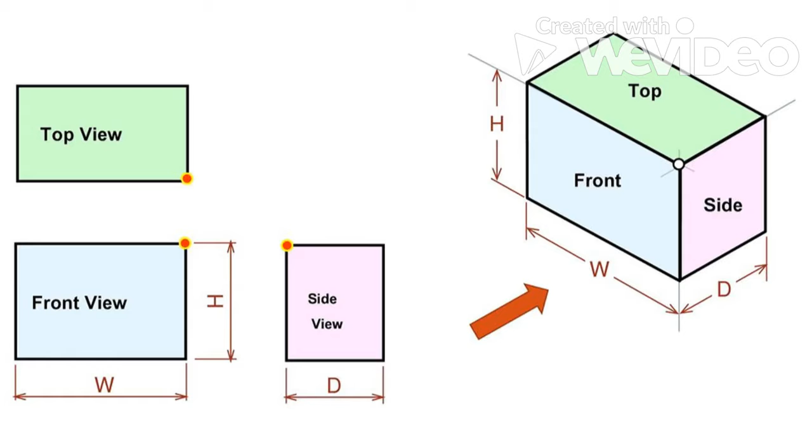When we combine these three views into a multi-view drawing, this is what is commonly referred to as an orthographic projection. It's a common method of representing a three-dimensional object using three two-dimensional projection drawings, usually the front, the side, and the top. Now, these drawings can be made by drawing from life, such as from a three-dimensional model, or you can use your imagination and just draw directly out of your head.

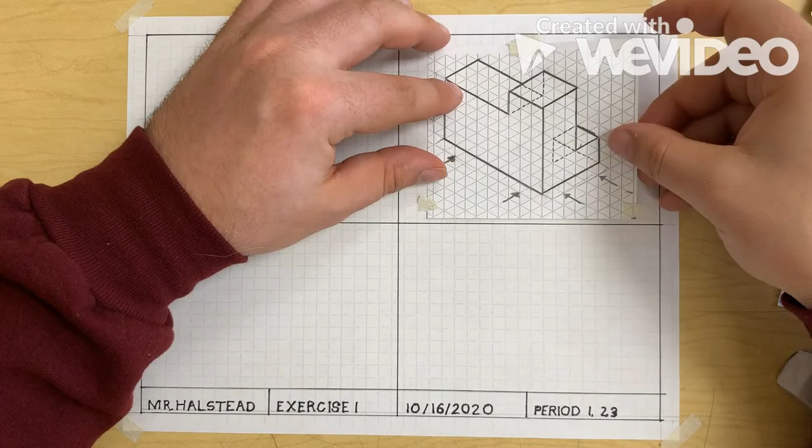Today we are going to be using an isometric drawing, just as we did in our last lesson, which for now I'll tape right here in the top right quadrant. This will later be removed, but you can work directly off your computer screen with the image I upload for you.

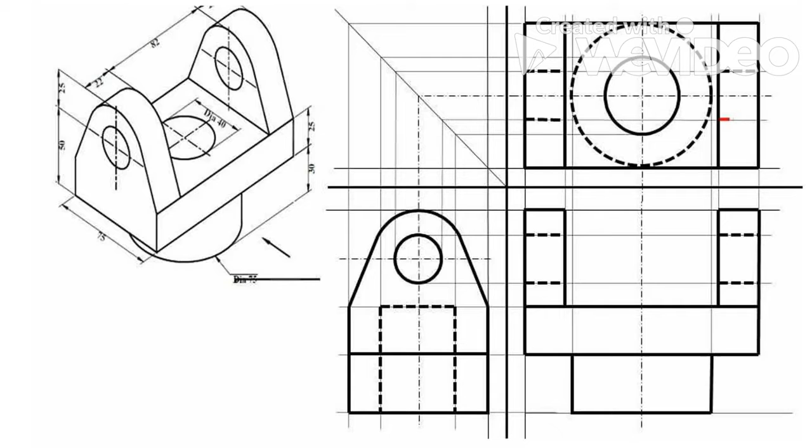Simple orthographic projection drawings such as this are commonly used to machine brackets for certain industrial purposes or simple parts, but with a bit more practice and a bit of imagination, you can make something more complicated, such as a design for an automotive company. Such a step would be an integral part in the design process. And it's also used in things like game design or 3D animation for designing characters as templates when doing 3D rendering.

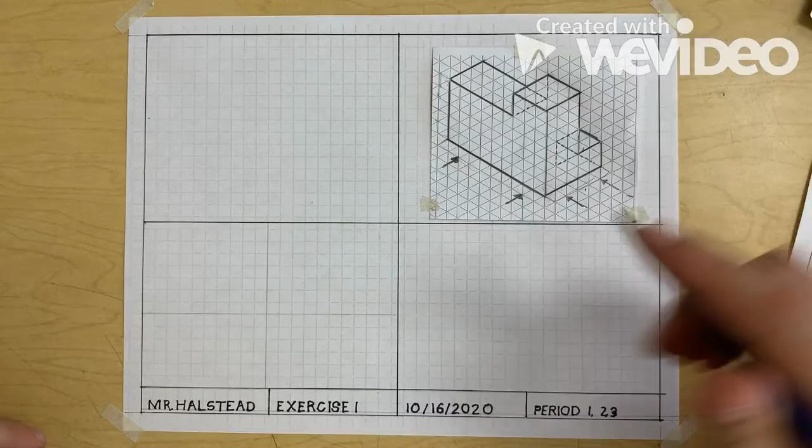So just to get caught back up to where we were last week, we did the first view, which is the front view projection. We know that the isometric graph paper is 1/4 inch, which corresponds to the 1/4 inch graph paper that we're using to draw our 2D projections. So we can just count the cells and quickly block in with some construction lines the shapes we need in the center of this drawing plane.

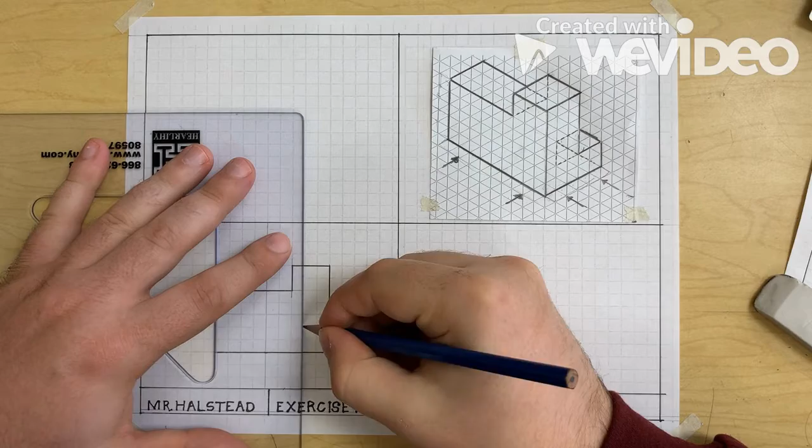And then we'll go back over with some visible lines to the outside edges of the object. And we'll include any necessary detail with some hidden lines for the back, which will be shown in another view in more detail, such as this side view projection, which I'm about to begin.

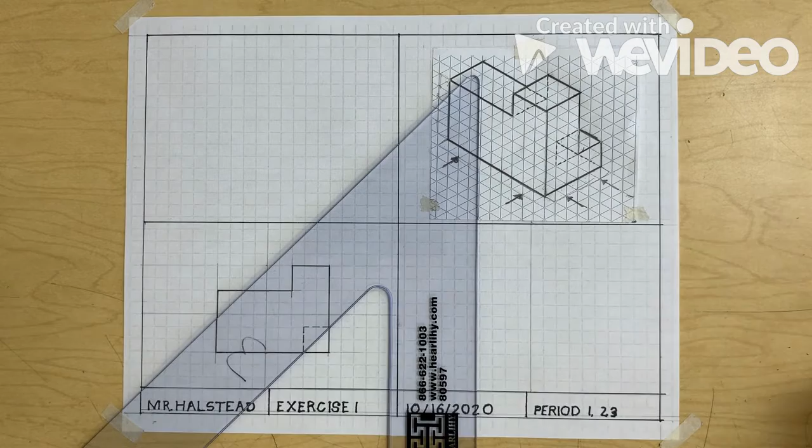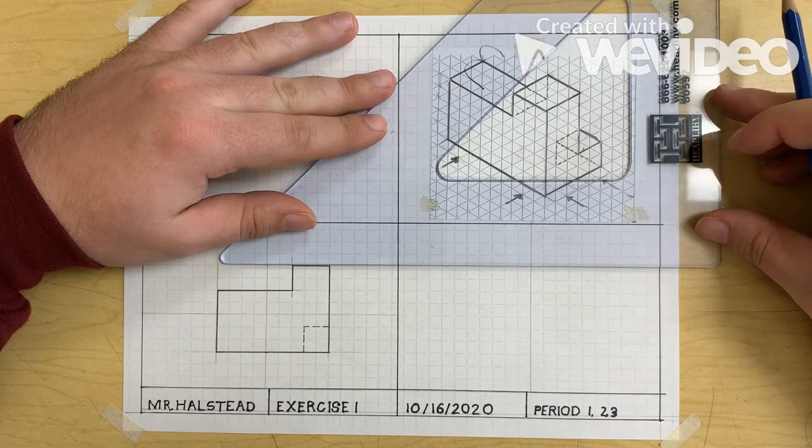Now, I'm going to choose where to draw this side view projection. I'm going to pick a line that's close to the middle of this quadrant, much like we did when we started the front view projection, but I'm not going to do it for the y-axis of the drawing, the up-down dimensions. I'm going to use something called projector lines to determine the height of each section of the shape I'm drawing, as opposed to duplicating the steps I took in creating my front view projection by remeasuring and recounting the number of cells in each shape.

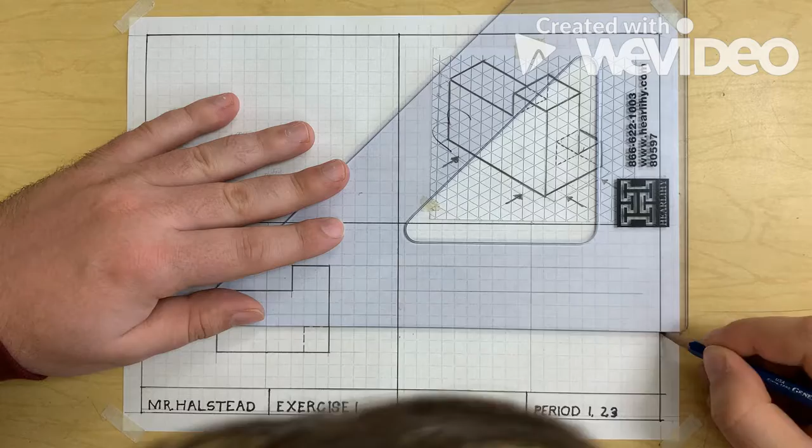This might not seem like a huge advantage on a simple drawing such as this, but when drawings become more and more complex, this method is a necessary step for ensuring that your two view projections correlate perfectly to one another and line up perfectly, because these are supposed to be the same object. If you draw your side view projection with things that don't line up perfectly, you're not drawing the same object anymore. You're drawing two different objects.

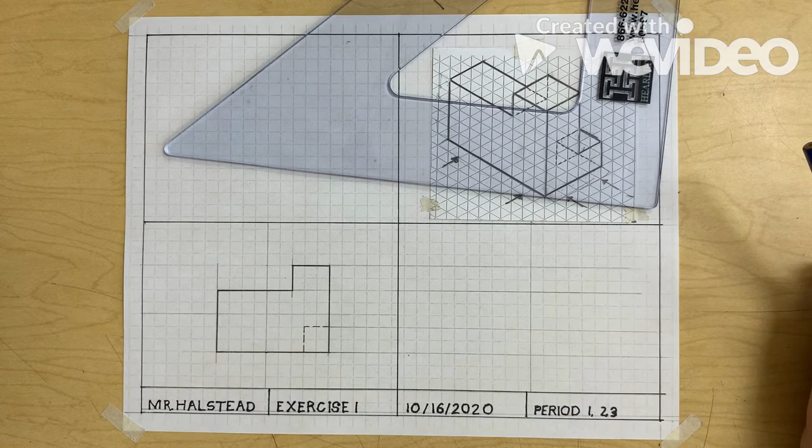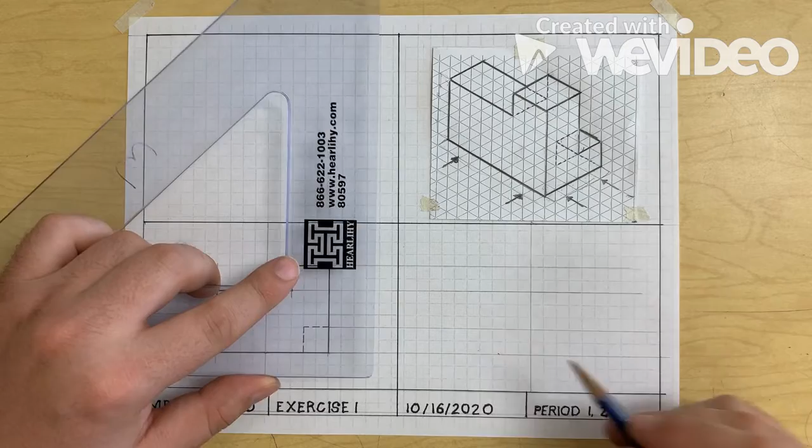So here we have these projection lines which give us the height measurement for all the important points in our drawing. It's almost as if we could slide that over and use it as a template. So now I just need to figure out how wide any given point on my drawing needs to be. I'm going to start with the base of the object as the widest point, being 4 cells wide. So I will count over 2 cells and draw a construction line for the left side of the object.

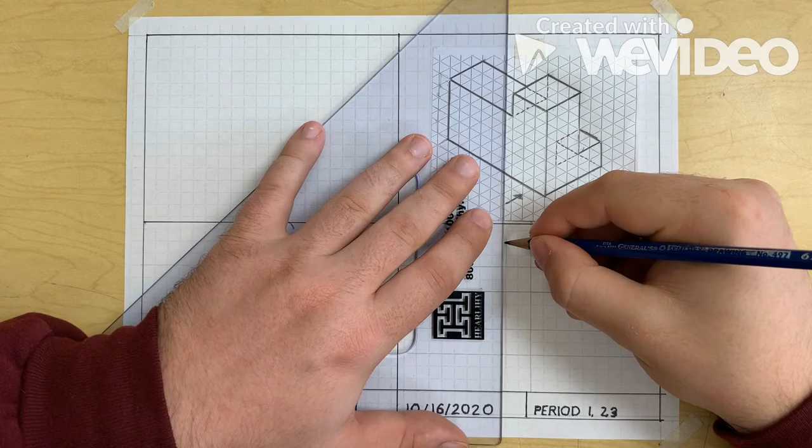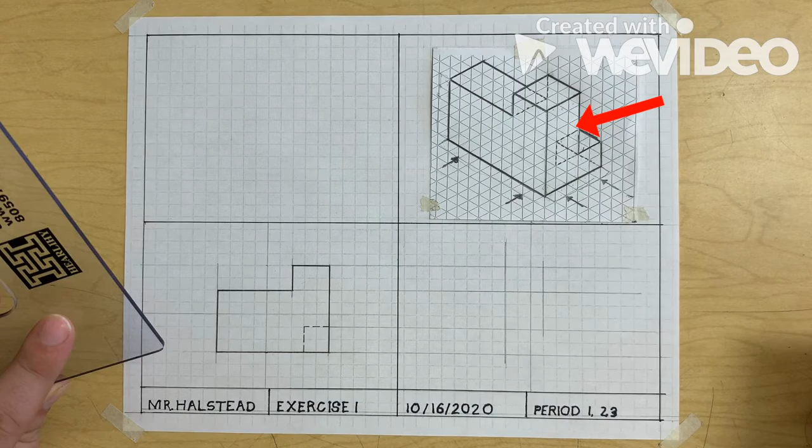That's that tall front corner on our isometric drawing. So I'm going to draw that right here with a light construction line. And then I'm going to need to make a measurement to see how wide the corresponding right side of that section is. So that's 3 wide, so I'll count 3 cells over, which puts me 1 cell past the midpoint. There's my right side of that section, and now there's the 2 cell tall section and 2 cell wide section. So I'll do a short construction line there.

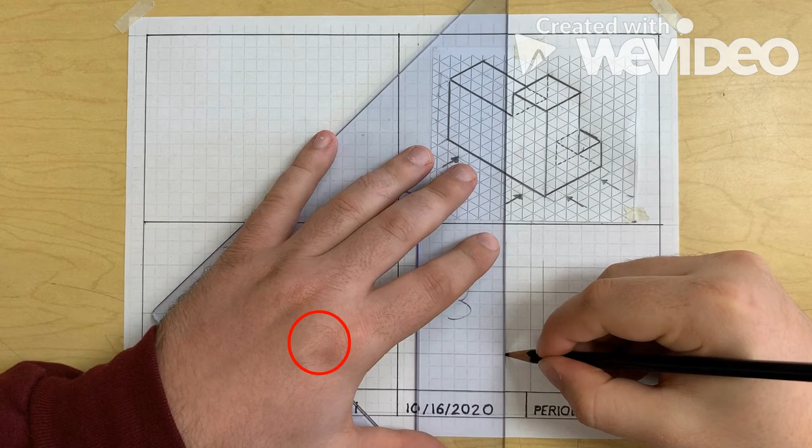And this is that section of the drawing that we drew in hidden lines on the front view projection, which we can now draw with object lines on the side view projection. This is an important distinction, which we'll learn about more when we talk about dimensioning. If you remember our lesson on the alphabet of lines, I said we can't dimension to hidden lines. So when I want to add dimensions to this drawing, I would need to do so in a view which shows the height of that section using visible lines.

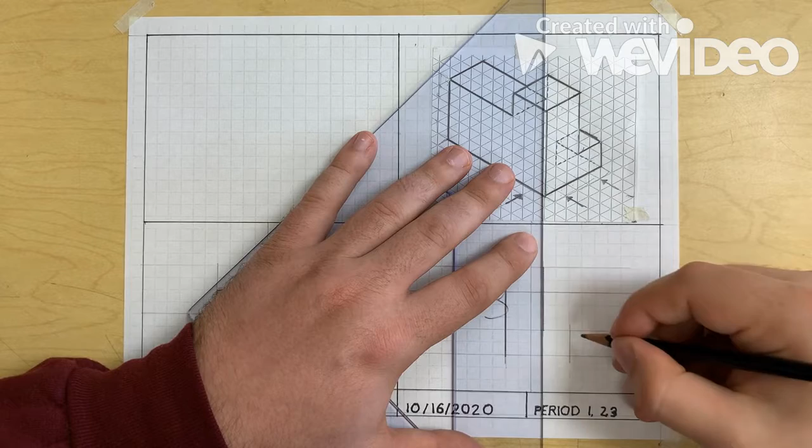And once I have everything blocked in using construction lines, it's very easy to go in and trace over those construction lines with the corresponding visible lines to create my projection. It should be easy to see this section that I'm blocking in using visible lines.

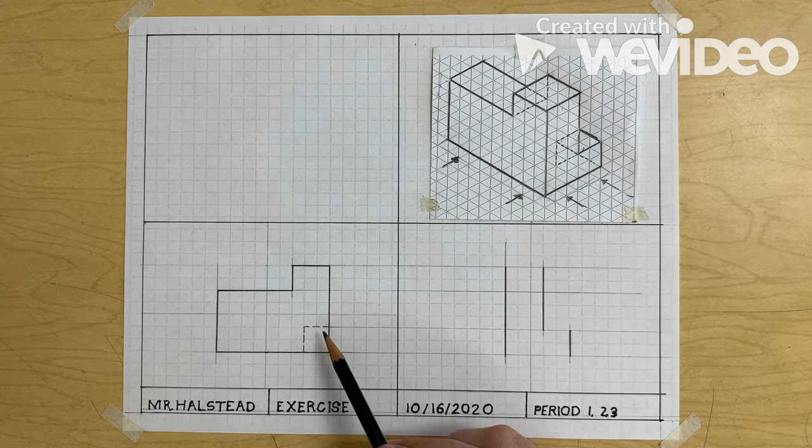Once I've finished blocking this section using the visible lines, I'm going to look to see where I may need to include detail not visible from this perspective with hidden lines, just as I did in the front view projection. But first, I really need to finish blocking this in using the visible lines to create my completed side view projection of the hard edges of the object.

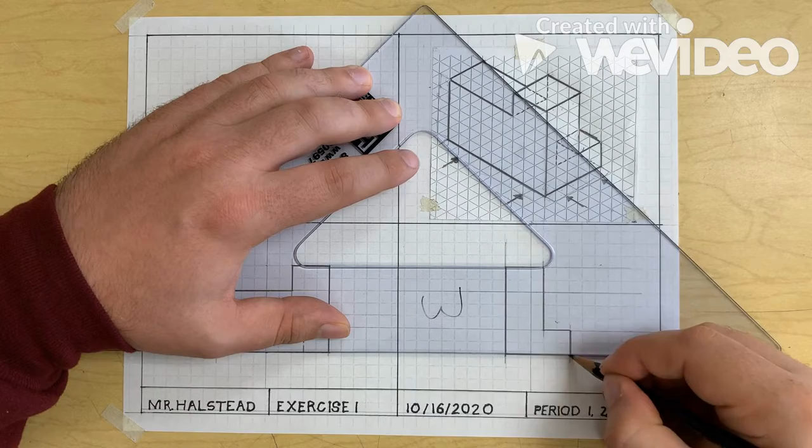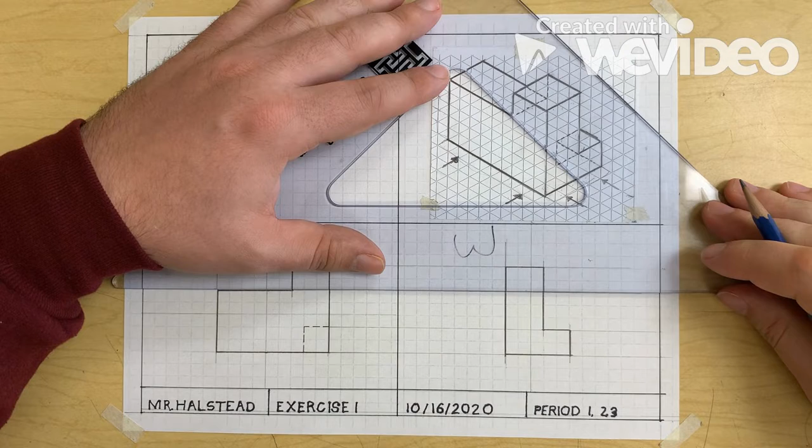Okay, now I want to look at my drawing and say what important information about this object is not visible from this view. And it's pretty easy to see that this back edge here is an important characteristic of the drawing that I can't see from this view. So I'm just going to draw that in exactly where that corner would be using some hidden lines. Those are those dashed lines we use in the front view projection.

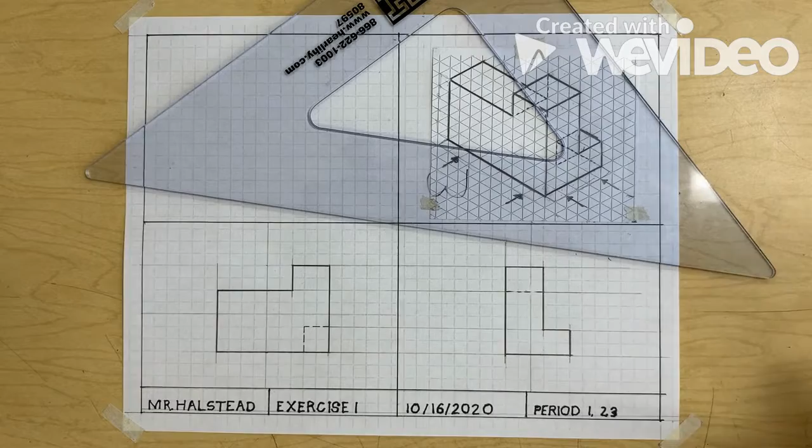We'll use those again here to show that the height of this object changes, and I just want to erase those construction lines that are still visible between my hidden line. I probably should have erased the construction lines first before drawing that hidden line. It makes things a lot easier.

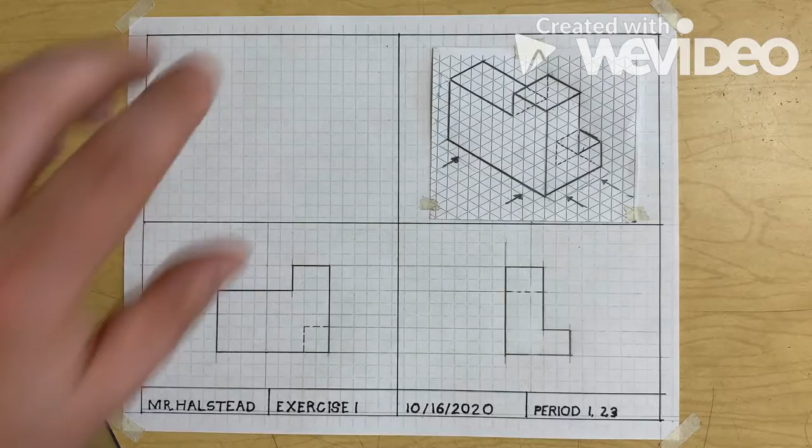So here I have my completed side view projection. It shows the important information I can't see with the hidden lines, and it's perfectly lined up to my front view projection. Now I need to do my top view projection. And again, we can use some information from our front view projection drawing to help us line up our proportions for our top view, just by extending some of these construction lines as projection lines.

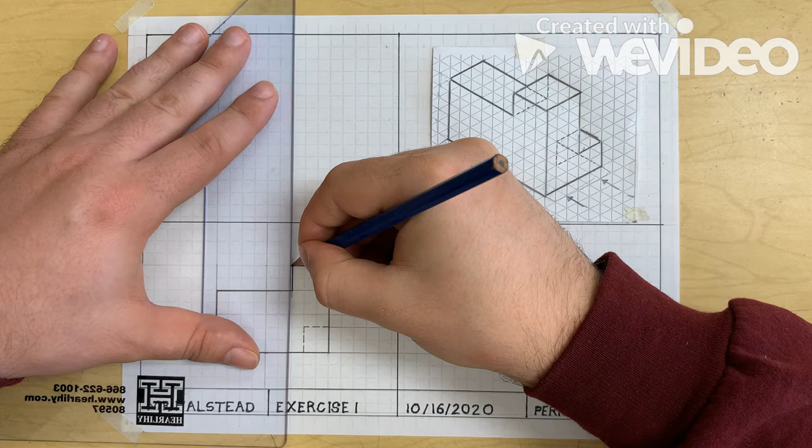We can go ahead and perfectly line up the sections of this object for our third view, which is our top view. So any detail I have in this front view projection, including the hidden line detail, I'm just going to project that right up to our top view.

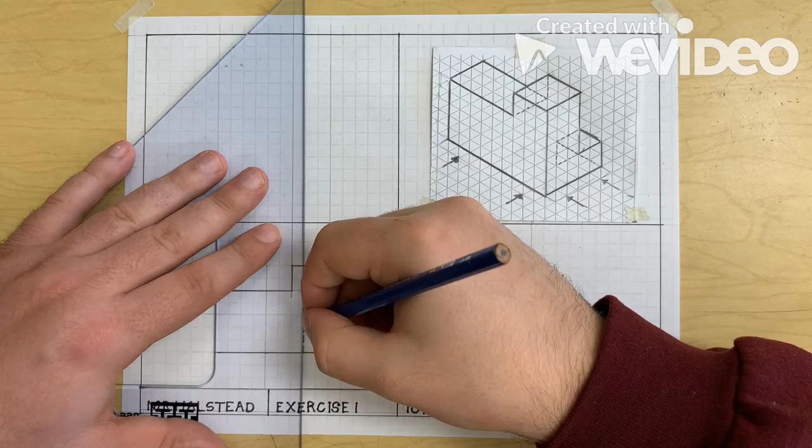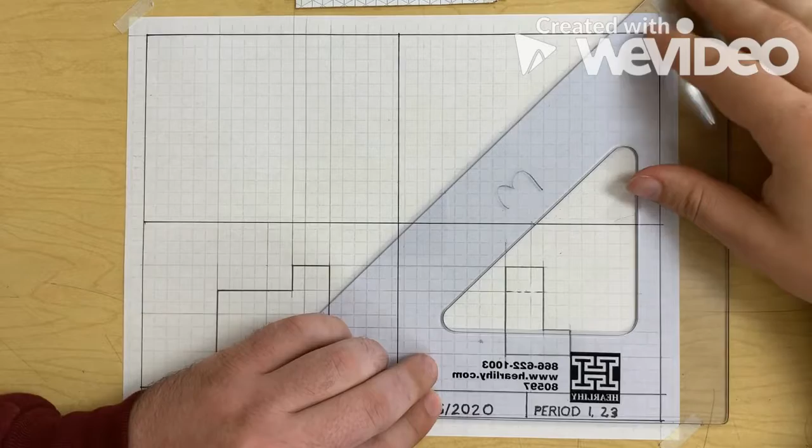Now, how do I get the information from my side view projection over to my top view? Well, there's a way to reflect those details over. And to do that, we need to use a 45-degree angle. Now, normally we could use this triangle here, which is a 45-degree triangle, to do so. But you guys are going to have to use your graph paper to make your 45-degree angle.

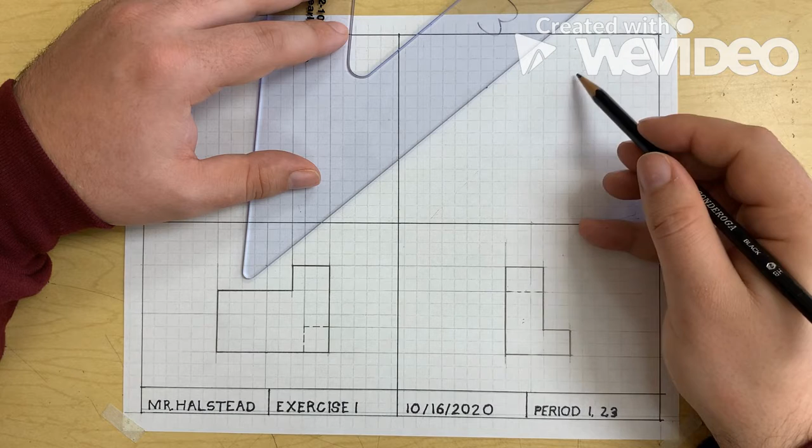Now, I want to make sure that I draw this over the top of the object which I'm reflecting it over. You'll see why in a moment. So I'm just going to make a nice light line through the corner of each cell of my graph paper and make sure that that line extends far enough to completely cover the object which I'm reflecting.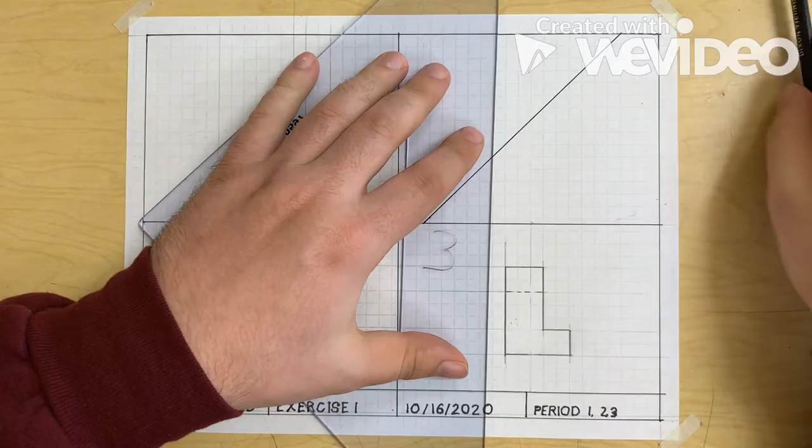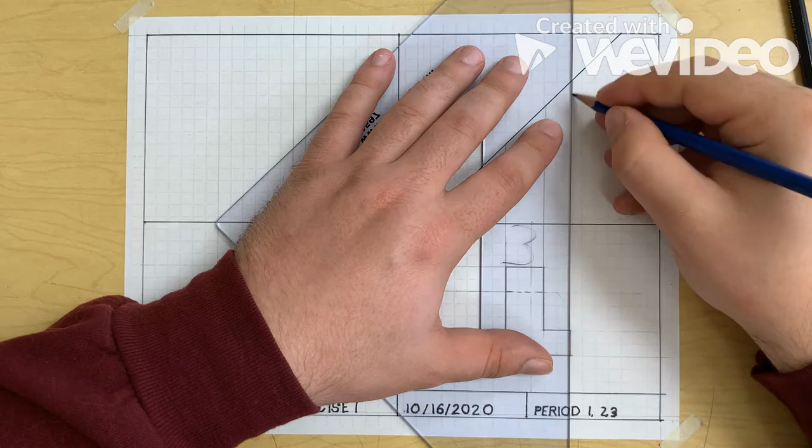Okay, so once I have that drawn in, I'm going to go ahead and extend my projection lines up from the important detail edges of my object from the side view. And they should meet at the diagonal 45-degree line exactly at the corners of my cells. If they don't, I didn't do it correctly. So make sure your line was drawn straight and your 45-degree was drawn correctly. And go ahead and draw those projection lines in for the important edges of the object from the side view.

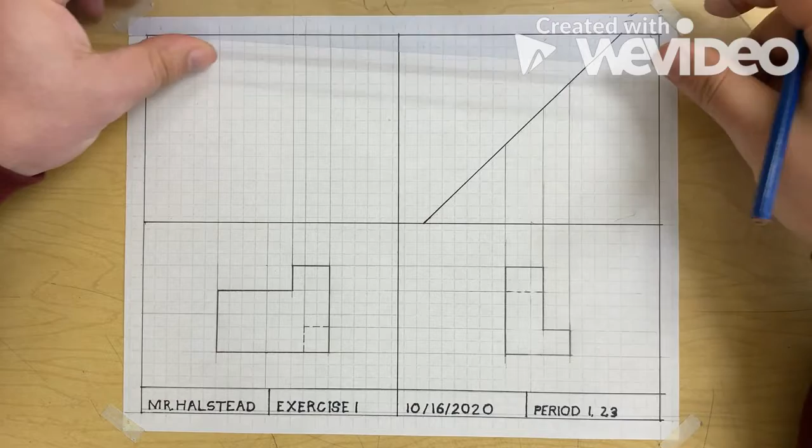Once those are drawn in, you can then draw lines perfectly perpendicular across that 45-degree, and that will translate them exactly to the right position on our top view projection in the top left quadrant.

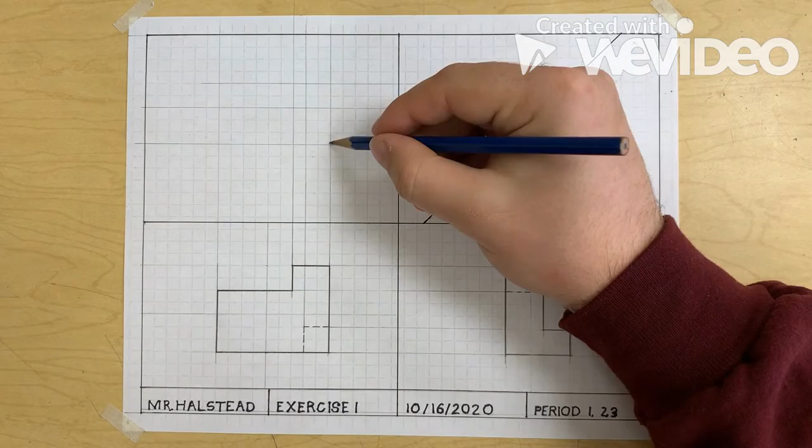Now, once I have all my projection lines drawn in, I have all the information I need to block in my overhead perspective using object lines. The difficulty is knowing which edges need to be blocked in and which ones are just overextensions. This can be pretty easily figured out if you just look and see what points correspond to which intersections for your corners of each object, because any point on the object will line up to a

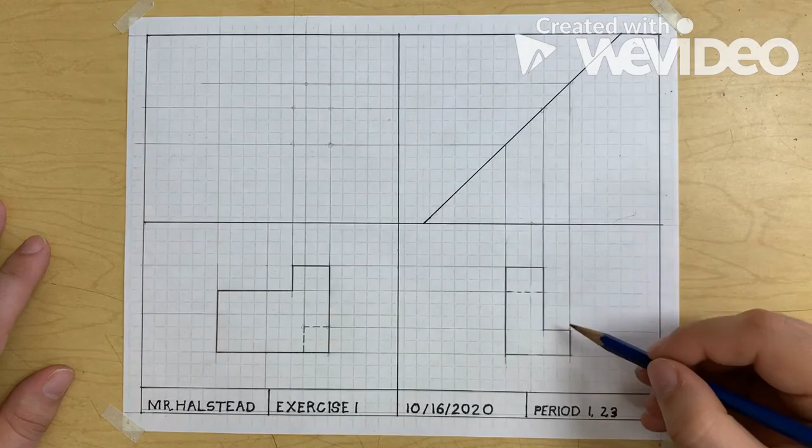corresponding edge. So if you want to, you can just follow the projection line from any corner of your object to see where the lines intersect to find that corner on the overhead view. Again, it's very easy to see this if you have your isometric object to reference. On a more complex drawing, it's helpful to know that if you need to go searching for corners or edges, you can do so using this method. But you will all be able to very quickly see the outline for the top view projection just by referencing the isometric drawing.

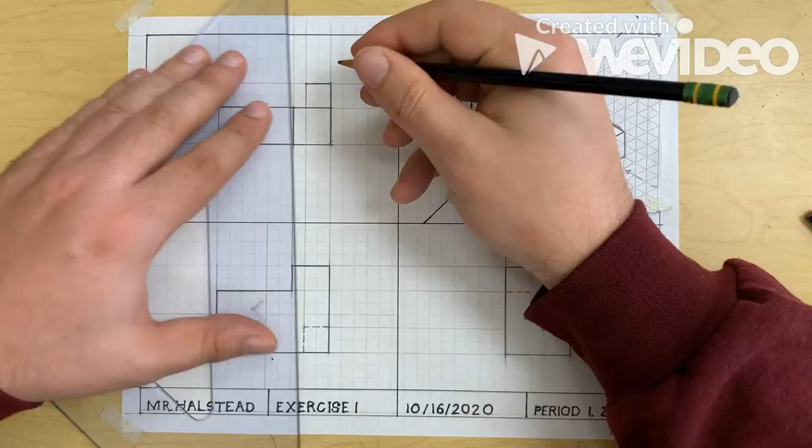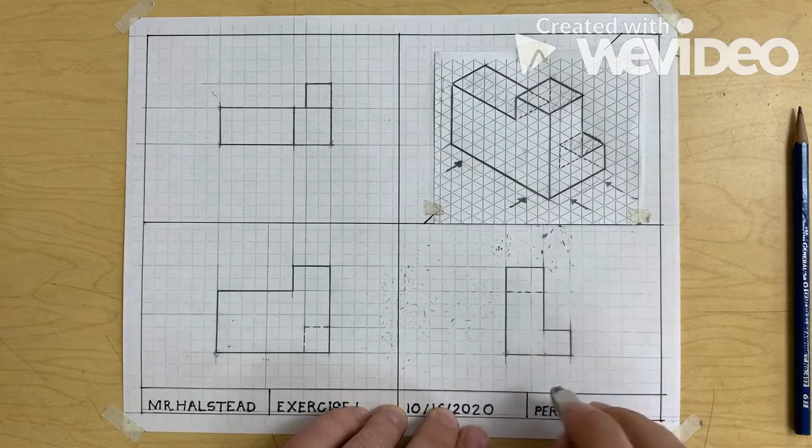You can see the three sections of the top there are variously displayed in object lines. There's no information that's not visible from this perspective that we would need to show in hidden lines. So that would be the completed version of our top view projection. And with these three views, you have a completed orthographic projection. All that's left to do is to go in and get rid of those construction lines.

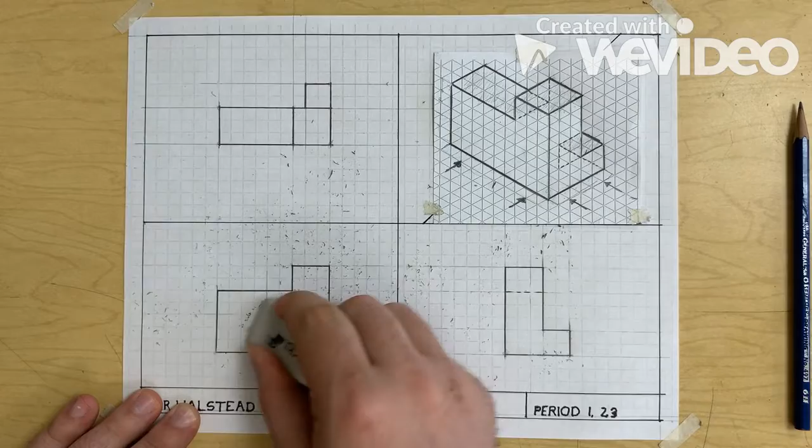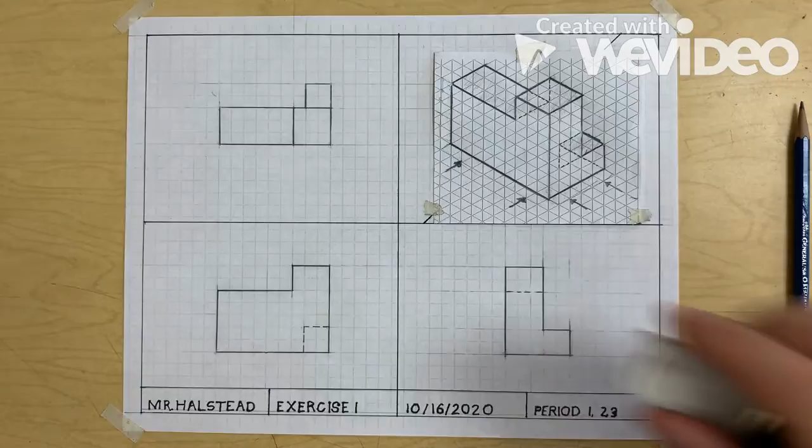So I hope you enjoyed this video lesson on how to complete an orthographic projection. If this moved a bit quickly for you, remember there is a lesson dedicated just to how to complete a simple front view projection, and that information is relevant for completing the other views as well. As we move on to more complicated drawings such as radial forms like rounded corners, cylinders, circles, or sloped edges and planes, the same principles that we learned in this drawing will be applied to those new drawing techniques.